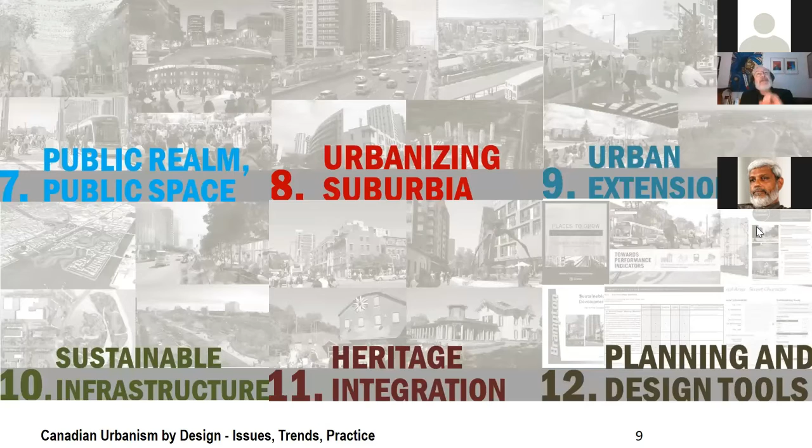Those are the 12 main trends, as I mentioned. I'm going to go very quickly through them, one by one, and try along the way. I try to do a bit of research and focus on what I think would be of interest to the participants.

Because, of course, the main thing is what is really common between a large cold country of the north and the opposite end of the world, an island, warm climate country. I think at the end, when I look at these days, there should be some commonalities in some areas of interest, because I mentioned global urbanism.

A few years ago, I had the chance to visit, a couple of times, and also do a charrette in Havana, Cuba—again an island, tropical, warm climate, very different than Canada. Working with architects, urban designers, and urbanists there, we found a number of real commonalities and real understanding of issues.

The first trend I wanted to highlight is regional planning. It's very important because we have these regional cities, large metropolitan areas. Here you have Toronto—the city itself has 2.7 million people, and the metropolitan area, depending how you measure, is around 6-7 million, going towards 8 and 10. Slightly smaller is Montreal, and then Vancouver.

This is quite challenging in places like the United States, and even here. What are the bodies that coordinate development for the entire region? The evolution is to go towards smarter growth management, something the government of Ontario started around 2006—the emergence of a stronger urban structure with nodes.

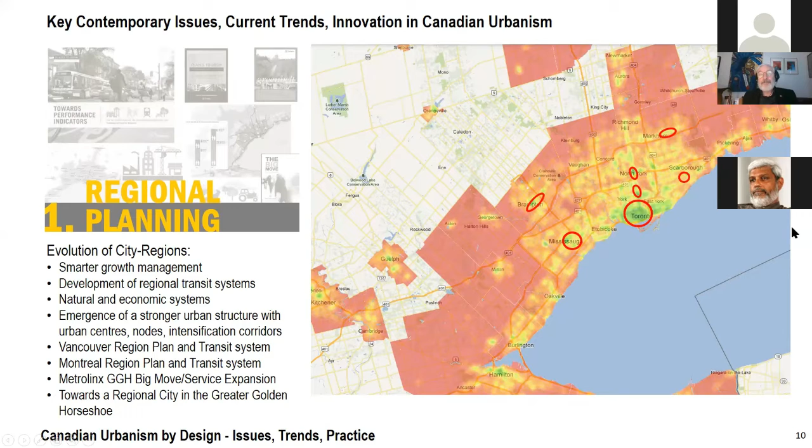The second major area of work and trend is this whole effort around resilience, sustainability, and public health—three overlapping areas, each with its own individual take. This is extremely important, as you know, through climate change all over the world, and there has been work starting on this for quite a while.

As an example, more recently on public health, over the last 15 years or so, resilience came to the forefront, mainly through adaptation as well as mitigation to climate change. It's extremely important because on one hand we have some of the highest gas emissions in the world due to our resources, but at the same time we have a lot of water and resources, and a growing population.

I wanted to highlight the tendency in the last few years toward measurement through a more global, composite system of indicators. Some focus on resilience, some—like the Conference Board of Canada's community well-being, or One Planet Living—try to put together not just specific aspects like energy or pollution, but also more social aspects: health and happiness, equity, local economy, culture, all together, to try to measure and respond more objectively to what makes a development sustainable.

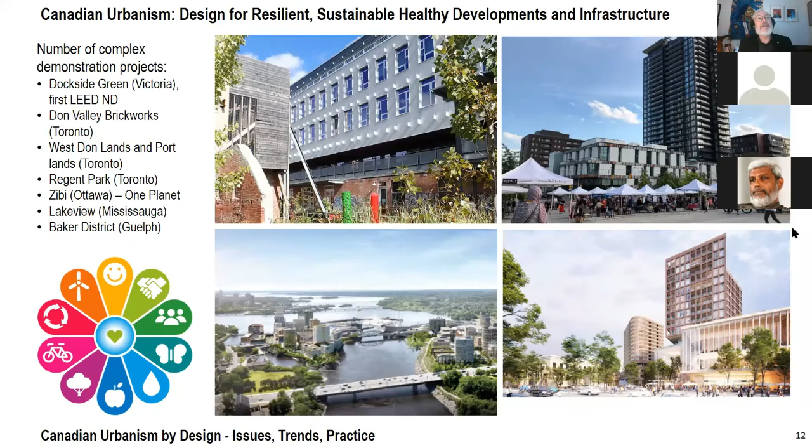There is the Zibi in Ottawa coming up, quite an interesting project, started construction, in a way built on the local heritage in the middle of the river, has some indigenous planning relationships and issues. And there are others I'll show a little bit later on.

Then here it's about the neighborhood scale, which in particular urban design deals with. I mentioned health by design, and this is work where we started to work together with public health agencies. It's not the mainstream healthcare, but the public health agencies, and now this is speeding up through the pandemic, dealing about nature in the city, looking at cities as a solution to global problems, including to a certain extent things like nowadays the pandemic, thinking about the human habitat in a system, in an ecological approach, thinking about livability, and a number of other things, access to food, eco-design.

It's a very important context here. In the region of Peel, which is the kind of county, the regional government here in Brampton, Mississauga, this emerged quite early on, and it was focused because at the beginning of active living, active transportation, because it's very much car oriented. It's a generally suburban area, and we work together with Peel Health in a very collaborative manner.

From those guidelines, we came up with measurement indicators, and those indicators right now are applied to various scales, from the precinct to the block to the site, and are being updated right now to include some of the resilience aspects.

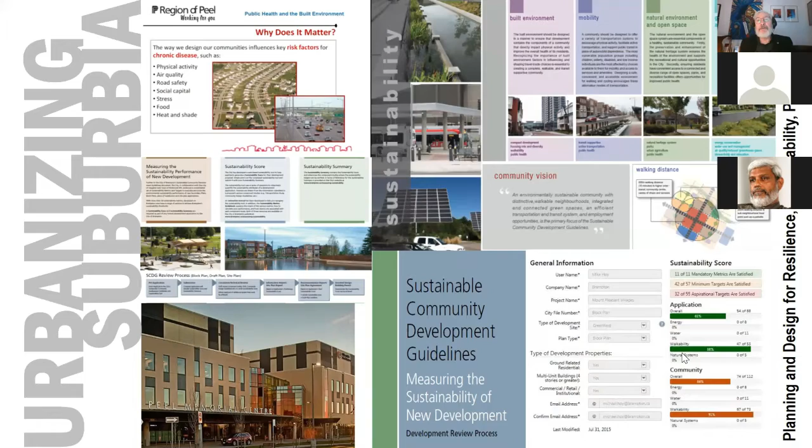You see here a bit of a different approach, which is more through conservation authorities, through engagement, the promotion of what we call low impact development, integration of nature, and I'm going to have a bit more later on, but going all the way down to engaging the residents, particularly in urban areas, to increase perviousness, to apply these softer methods as opposed to the hard engineering when it comes to infrastructure.

A third major trend across the country is sustainable mobility, because as I mentioned, the last 70 years, the orientation after the Second World War towards cars was very much a replacement of working transit systems in place since first was, of course, the rail system that united the country, including at the regional level, and then later was the streetcar system in the 1920s.

And now, of course, in the last few years, not just in the major cities, but also in the regions, right? That includes the whole hierarchy of system, from the regional, the high order, rapid transit, LRT light rail transit, BRT bus rapid transit, a lot of focus on active transportation, thinking about transportation, sustainable mobility, movement, access, level of service, then go beyond the conventional car-oriented engineering.

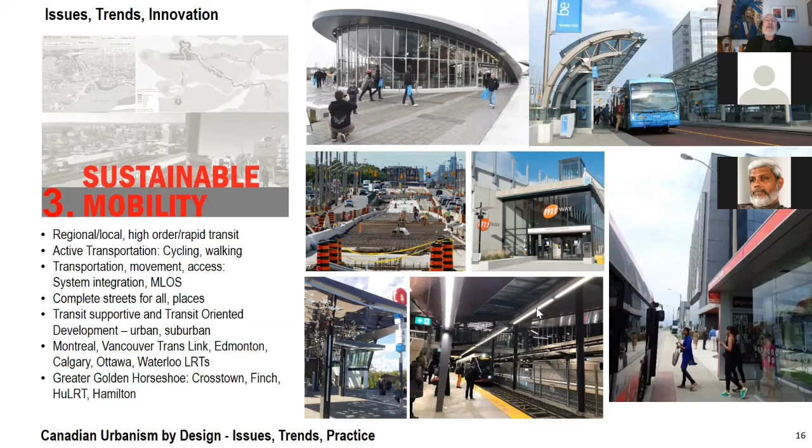The next two issues I'm going to mention very briefly, and my colleague James Park is going to talk a lot more about Toronto's perspective of redesign and downtown. But unlike many other places, in particular in the United States, Canadian large city downtowns have not generally been abandoned in the 50s, 60s and 70s. There were always people living here in Toronto.

But of course, the Toronto downtown started in the 80s to bring a different dimension. Montreal as well. You have here examples like Griffintown, a great development very close to the core of downtown. It was not just a business district with offices being emptied at 5 o'clock.

Vancouver was very much the same, to the extent that they became, in a way, victims of their own success with problems like very high densities. Affordability is a huge problem, lack of amenities, lack of open space. Mid-sized cities, though, and smaller towns, they still struggle, including the city where I work, Brampton, and then those suburban downtowns have challenges, but they're coming. We'll see a bit in a minute.

Another major trend is transit-oriented development and infill intensification, particularly large master plan communities. This was present in certain ways since Don Mills, the suburban towns of the 50s and 60s, but came to be in particular in the 70s and 80s in Toronto's St. Lawrence neighborhood, with the idea of continuing the street grid and integrating into the downtown.

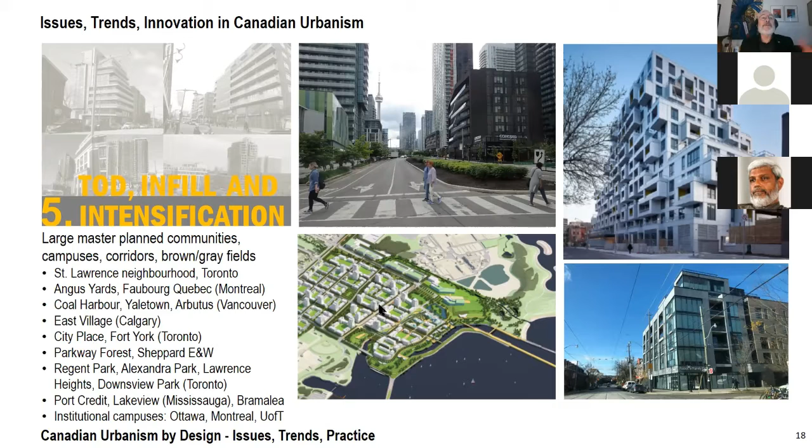This also could include the main institutional campuses - the University of Ottawa is integrated in Toronto, Ryerson, and in Montreal as well, integrated with the city. James is probably going to talk a lot more specifically about this aspect.

Very important and particular - we like to think this is a bit of a Canadian characteristic - the fact that we look a lot more at social aspects, social justice, diversity. There's less inequality; we usually compare, like many others, with the United States. This came since I would say the 70s, even the 80s, to think about vulnerable populations, social support and services, diversity, minorities, immigrant integration, affordable housing and public transportation.

These are very good unifying elements, and there's a long-standing tradition since the 60s and 70s, though going through challenges of privatization. Public realm amenities as places for all - age-friendly development, we call it, from 8-year-olds to 80-year-olds - and more recently, with the graying and aging of some segments of the population, thinking about aging in place.

There is great experience - I mentioned Regent Park, Alexandra Park, Benny Farm is a great development in Montreal I can relate to. This came right to the forefront because of the pandemic, but even before that. There's a lot of work still to do.

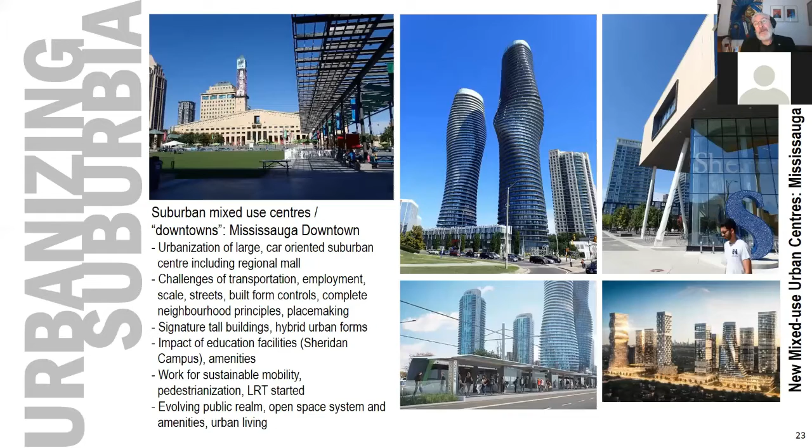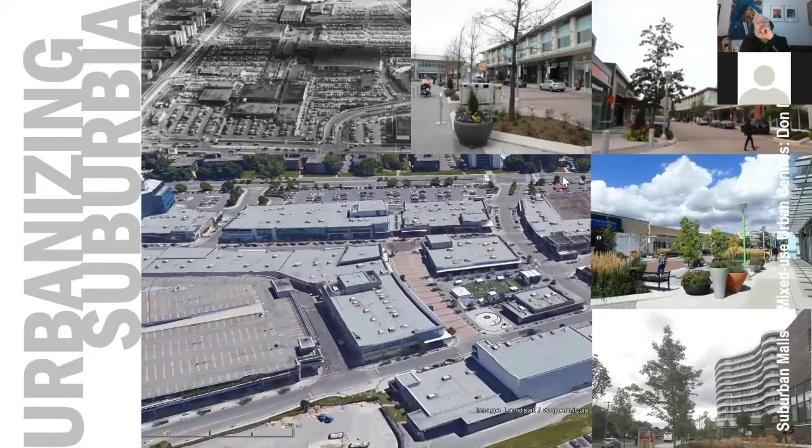Another major trend that started in Canada as well as in the States: in the 60s and 70s there were a lot of these car-oriented malls, surrounded by a huge area. This is the center of the mall at the center of Don Mills, huge parking lots surrounding the whole area with some little one-story buildings. This started around 10, 12 years ago to be intensified and urbanized.

They introduced the grid of streets, they introduced placemaking elements, the streetscape. It's more like a main street. It's still largely private, and the most important thing now is it's coming with the residential and the densities, and people actually living there. Right now in Toronto alone there are 22 projects of this kind happening, because those large parcels of the malls and major plazas are the most available land for development.

It's coming not just there, it's coming in Calgary and many other cities. It's a very important aspect, and they're becoming real centers at the end. One aspect that's sometimes neglected, and to me it's very important to unite the city together—I mentioned transit-oriented corridors—then it's good to have these nodes of density. How do you unite them? How do you build on the urban structure?

Here you have an example of my work from around 10 years ago, on Queen Street, which is a major spine uniting all the suburban areas we call 905—that's the telephone code for this area. This is linear transit-oriented development with nodes at the major stops, and the transformation of what is right now a very suburban 6-7 lane road into a complete street with transit in the middle, with BRT, and a variety of residential forms, making this really livable with supporting open space and so on.

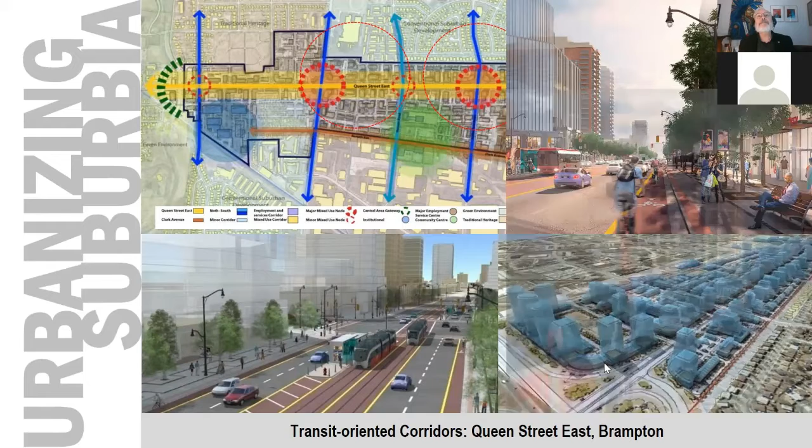And development is already happening. We hope to go from this transit system, bus-based now, into BRT in the near future.

Very important, as I mentioned a little bit, is this transformation. We have a lot of very wide, fast roads—killer roads. We hate them as urban designers. And transformation has begun. On the left side you have Highway 7 in Markham being converted, including bike lanes. In Vaughan, another city north of Toronto, there's this kind of woonerf design where there isn't a very clear definition and cars slow down—it's a place for pedestrians, a semi-private space. Development in Mississauga and others is quite challenging, working together with colleagues, engineers, but it's very important.

A major trend, also distinguishing many Canadian suburbs—where government's role was much more important as opposed to the States—is the reliance in urban context on urban amenities. You don't have to have a very big backyard because you rely on public libraries, recreation centers, parks, and so on. In the suburbs it's even more important—that's work we've done in Toronto, in Brampton, and many other places the last few years. You have some examples; we promoted this.

Modern design, because of the modernist tradition of our place—you have here examples of amenities in Chinguacousy Park in Brampton, including some very modern gazebos where people can gather. It's bringing together our very diverse population; in Brampton more than half of the population is born outside of Canada, making it one of the most diverse cities in Canada.

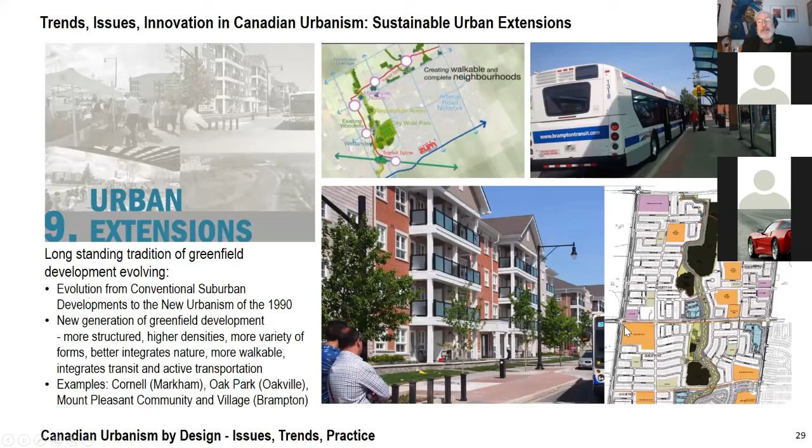The core of it, what we call Mount Pleasant Village, was designed as a more radial form. It's fully walkable, 5 minutes, 5,000 people. It has the square in the middle with public amenities, now the market, the bike system, and the first complete street, a place where in the square people can go. We have yoga day, a number of examples there.

And we use a lot of what we call alternative development standards. Innovation is very challenging, particularly when it comes to engineering.

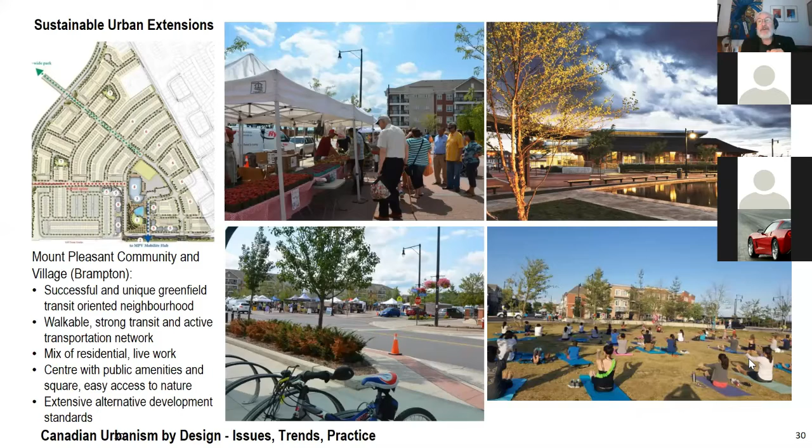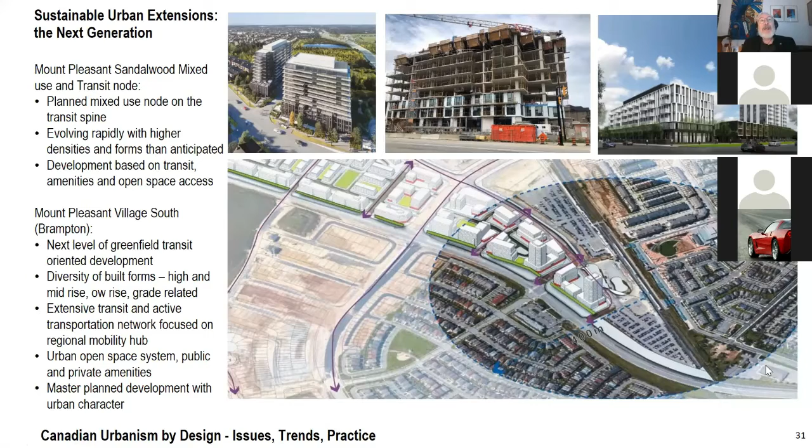Here you have the node, the center, we call it a mobility hub. You have transit expanding, the regional transit, 15 to 30 minute headway for the trains. You have the square on the north side, you have 24-story high-rises being developed, the whole neighborhood in that area, an open space system. It's all very much walkable. It's really a great story, a great example. I can tell people, if we can do it in Brampton, everybody can do it. It's established the new model for greenfield development.

The tenth item is sustainable infrastructure. It's a very important one, emerging particularly in the last few years. Why? Because, as I said, there was a lot of development in Canada, a lot of infrastructure built in the 50s, 60s, and 70s. Now that infrastructure—roads, sewers, water courses, bridges and all that—was done with the concept of the time, done monofunctional. The bridge has one function, to let cars cross a water body. Same for the roads, same for the water and all that.

Now a lot of these are coming of age, including highways, and they've started to fall apart. They need to be fixed, they need to be repaired. Now, because of the current view on resilience and sustainability, we can do that in a much better, more integrated way, where we look not just at functionality from the car perspective, but as a piece of resilience, a piece of green infrastructure, a piece that is also an urban design piece. It has an aspect which is not just aesthetics, it's functionality, and it's also a place for people. To me it's extremely important, and I'll show why.

There's a number of projects, including in Toronto, including in Calgary's East Village. I mentioned Bonaventure, Cartier Bridge. There are great projects in Toronto. Here you have a few examples: on the left side, a stormwater pond that, in fact, is a park feature in Calgary on the Bow River. On the right side, you have the port lands, and I just had a brief chat.

This used to be wetlands of Don River. The water was put in a channel at 90 degrees and looked at as a nuisance. Now the river is being recreated and put back. It's a $1.3 billion project that recreates nature, recreates habitat, recreates parkland, water storage, flood protection, and at the same time creates developable land on the side, because that creates this human habitat that I was mentioning.

On the lower right side is the first example built a few years ago, West Don Lands, where what you see here as a park with a little amenity on top is, in fact, a flood protection feature. It protects the major part of downtown from water, but it has a park on top of that. Not too many people realize what that is—it's not a dike, it's not a dam, it's something that people can use.

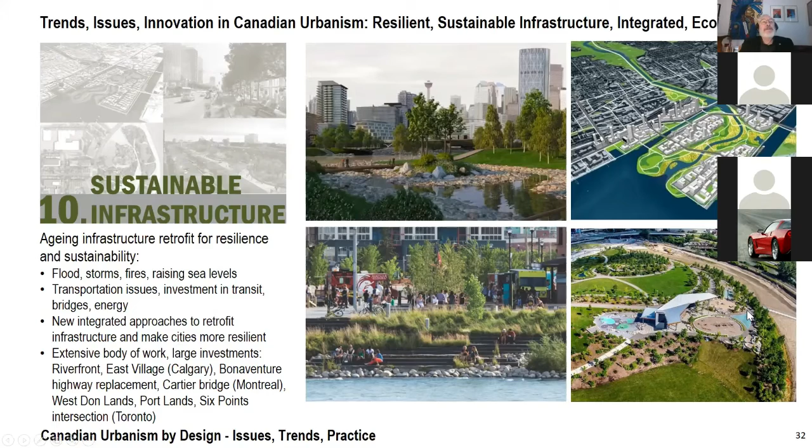Here I wanted to talk a little bit about the main project I'm working on right now, which is in Brampton. It's called the Riverwalk.

Brampton, this area was colonized by the British in the 1820s. Of course, they did this concession grid. Two of the major roads intersect on a creek. The creek didn't look like much—it was not enough water for the mill towns at that time.

But then every 5 years it started to flood the little downtown that developed. It's now downtown Brampton, a city of 660,000 to 670,000 people now. In the 50s, to take care of that, the channel you see on the right side was built, and that solved the flood problem for the next 75 years until now. Downtown never flooded, but it took the creek and the water away from the downtown and from people. Nobody knows that we have a little creek there.

In Brampton there's no mountains, no water body, it's just that Peel Plain. But guess what—with the advent of more catastrophic events through climate change, that whole area can flood again. Maybe tomorrow, maybe in 300 years, but as you know, the frequency is increasing.

We started around 2011, together with the Conservation Authority, to look at how we can solve the flood problem, but at the same time revitalize the downtown, which is prone to flood. How can we integrate this flood mitigation with economic development, resilient, sustainable, healthy development with public realm? How can we create a place, an attraction for a city that doesn't have anything major? How can we introduce innovation?

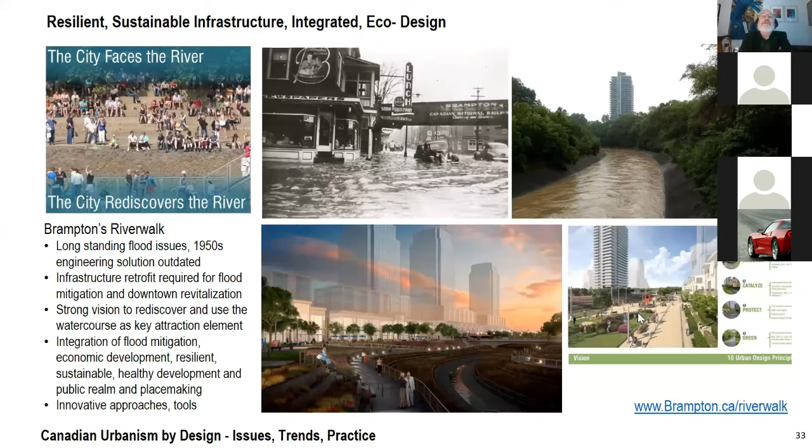We came with a vision in 2014—you have some images of how this channel, the creek, could look. We came with a number of principles, including to protect, to green, and we look at placemaking. You can see a lot more about this on the web address here if you're interested. Then, part of the vision, we have this integrated approach to planning.

We combine engineering, resilience, active transportation, public realm, and placemaking. We did an environmental assessment that was successfully approved last September. We secured funding from the federal government for 40% of the flood protection. We are working right now on an urban design master plan for the whole valley, and here's an example of what that means.

In a way, it's the Emerald Necklace of Boston brought back. It's creating a major asset and attraction. You'll see on the website, if you go, there is a video, there is a VR experience—virtual reality. That's a bit older, but we are updating it. In fact, we have that updated now.

Through the Urban Design Master Plan, through the detailed design for flood protection, we hope to go into construction by 2024. We still need some money for that. It's going to be a game changer for the downtown.

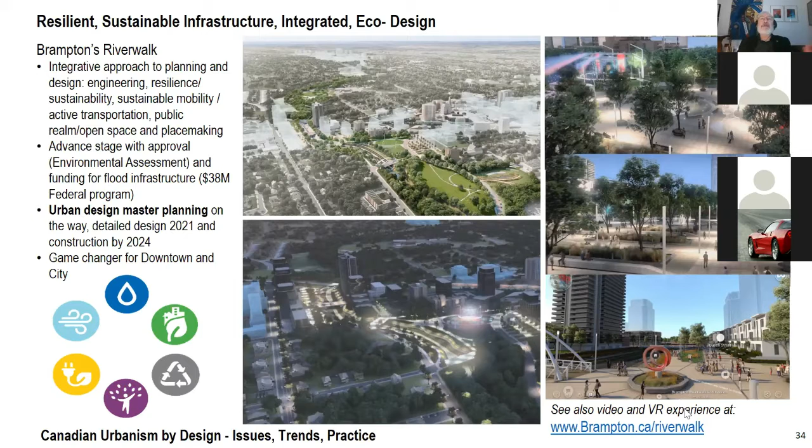Here I have some of the images of the parks, the squares, the place for entertainment, for people, the place where our very diverse population comes together. It's a place that can contribute to the public health of the whole area, access to nature, and so on.

And then the last trend is going to be in terms of planning and design, and the tools and the integration of design in the whole planning process.

Here we have in Canada quite some challenges, because starting mainly in the 60s and 70s, there was kind of a divorce between planning and physical planning, design, and architecture. As you know, the term urban design is specific to English language. Other languages and concepts like urbanism, Stadtplanung, or urbanismo, have design built into the concept. Then urbanists are also designers.

Then in Ontario, and Janaka is aware of that, and Jiva, 20 years ago, we started to go back into this, and we started to promote design in the planning process, in the planning profession, first with Ontario professional planners, later with CANU. We still work on that. There's a lot of work to do.

Part of that was to look at integration of design in the process. The diagram you see here is complex and takes quite some time, but shows how design at all the levels of planning, from the city-wide official plan to secondary plan for large areas to more detailed urban design focused plan, the precinct, the tertiary plan, all the way to subdivision plans, site planning, and so on. It's a thread going on in terms of built form, open space, character, and identity.

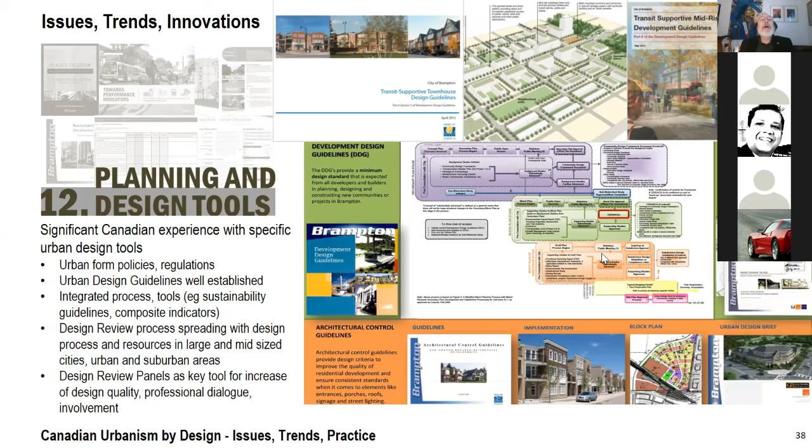Very important. Very briefly, I'll mention a tool. I don't know how your planning process is. In Canada, the development permit system came to be around 20 years ago, I think in Vancouver.

It brings together all these aspects that usually are disjointed, right? Policy, regulation like in zoning, guidance, and then the standards as well. In Brampton, we are the first city in Ontario to create such a system for a larger city. It could be a quick, effective development system, working on the quality. We have quality provisions here. It's an opportunity for what is called in the States form-based code, to integrate heritage, some standards. I don't know if you have that, but it's something important that we brought in Brampton as an alternative. It's slow to catch up though in Ontario, but that's another issue.

This is a bit of a new addition to my presentation slide, but I wanted, because of your interest in urban design and the profile of the Institute, to talk a bit about urban design in planning, in urbanism, at the municipal and private level, and the actions in particular.

Something with CANU, with the Urban Design Working Group, we set out to do some time ago: the need for design education among planners, engineers, other city building disciplines, architects and landscape architects. In December, I did a presentation at the Royal Institute. Many architects think, okay, I am an urban designer because I'm an architect. But there is an aspect of urban design that is not architecture at a larger scale. It has specific aspects, interdisciplinarity, and so on.

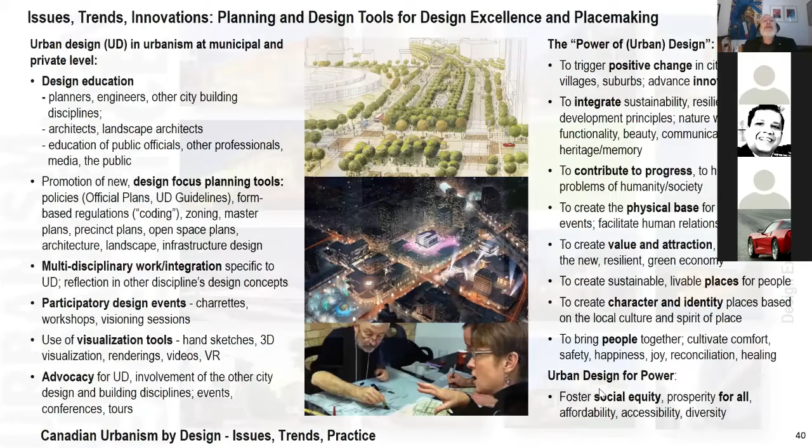Okay, for some reason this doesn't seem to... Okay. And related to that, the trend towards not just good design, but design excellence. There's a number of things that you have here.

It's a great way to use design, and particularly everybody has the right to access good design, not just downtown, not just wealthy people. That's why the suburbs in particular need these more than anybody.

And to wrap up, I think I'll try to do it in the next 2-3 minutes, a bit about the lessons of the pandemic. There was a lot of discussion, a lot of talk. It's still in the press. What's going to happen due to the pandemic?

And very briefly to conclude, I'm going to show some examples of the work. Access to nature and open space.

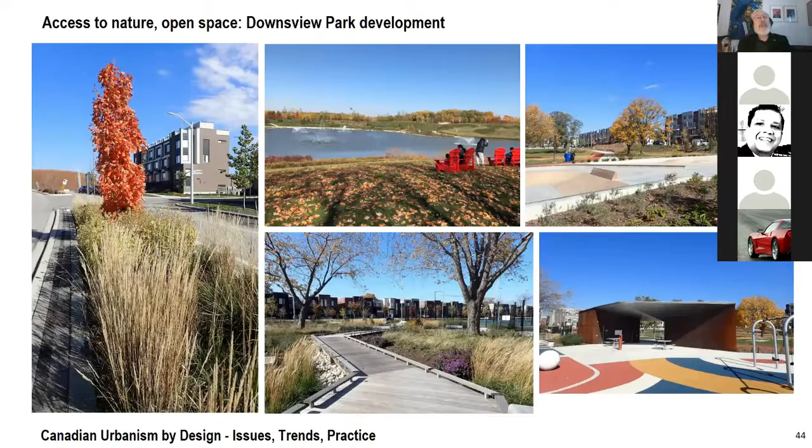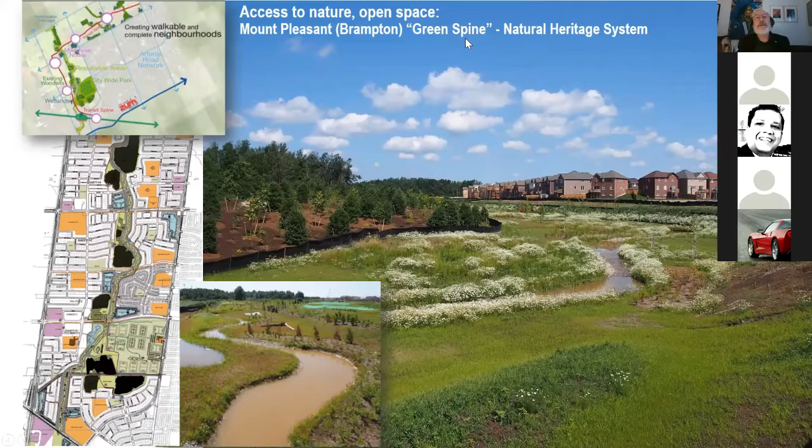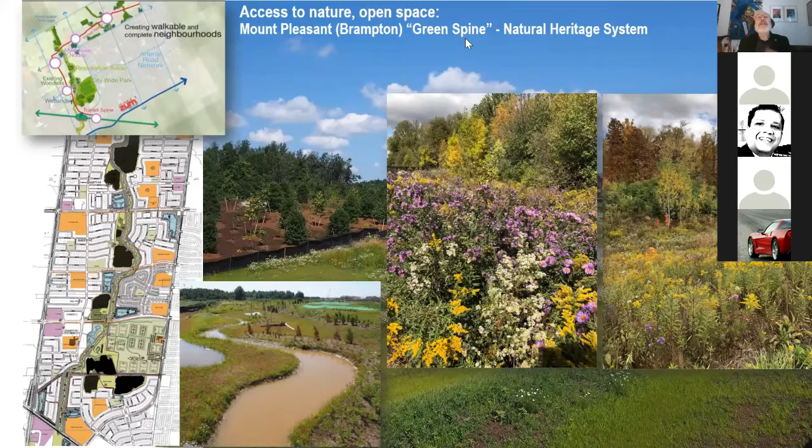Down in Brampton, we have the natural heritage area along this recreated creek, where nature took over in absolutely no time. It was a great experiment - basically this was farmland for 150 years, then we developed it and introduced this spine connecting woodlots and stormwater ponds, recreating water. Nature took over instantly. Look at the right side - you'd think this was the Peel Plain since 200 years ago. Nature takes over, just give it that opportunity.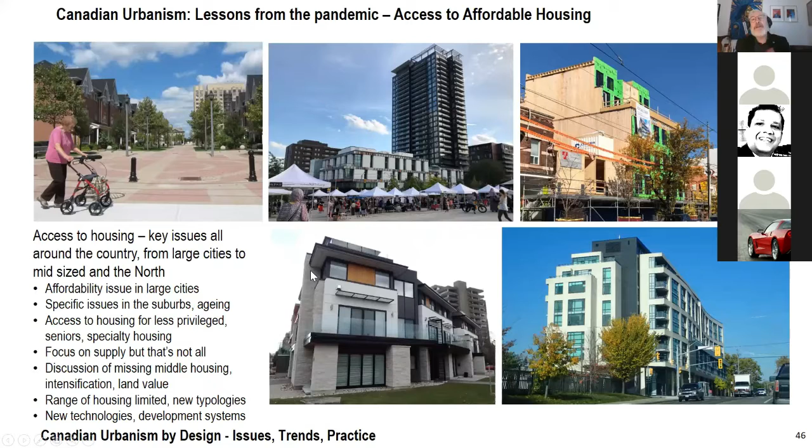On access to housing, a huge issue particularly in large cities, there's the whole discussion about missing middle - smaller incremental scale development. On the right side, you have timber construction, modern timber construction along Main Street, something we hope will come even more. Accommodating affordable housing isn't just through major infrastructure investment, towers and all that - it could happen through smaller, much more friendly development models. You have examples in Ottawa and some regions, mid-rise along transit, all these trends.

There's discussion that started from Paris about the idea of the 15-minute neighborhood. I looked at that and said, well, this isn't really that different from the ideal neighborhood concepts of 100 years ago, or even the way small towns like Brampton were created. Brampton 100 years ago was really a 15-minute neighborhood, complete with everything, all the amenities.

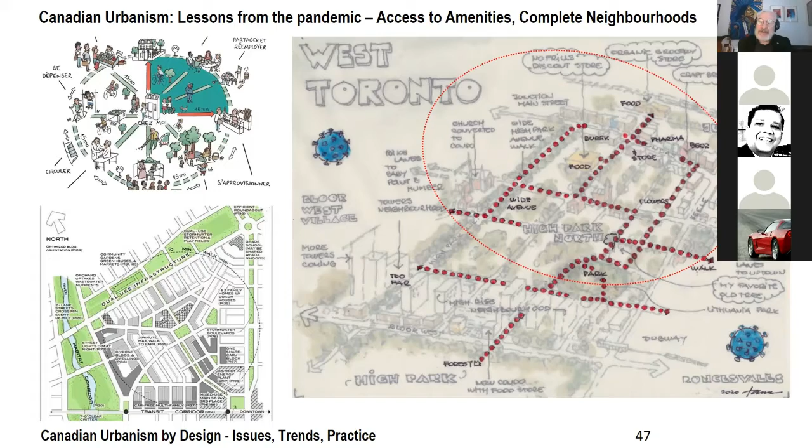On the right side is one of my sketches from the beginning of the pandemic, when I realized I live in a suburb of 1900. I have very much everything I need, including access to nature, greenery, and walkable paths. Right now we very much live in our neighborhood - there's no commuting, we use our car very little. This shows a kind of stress test in the pandemic of the neighborhood design I mentioned before.

There are great initiatives of sustainable mobility, long-awaited bike lanes for people who don't want to take the car, don't want to pollute, don't want to contribute to climate change - and it's physical exercise. In Toronto, finally, the bloor lanes, bike lanes, have been created in two months. In the summer, even in car-oriented Brampton, you see in the images at the bottom, suddenly taking advantage of less traffic, those bike lanes expanded like wildfire across the country.

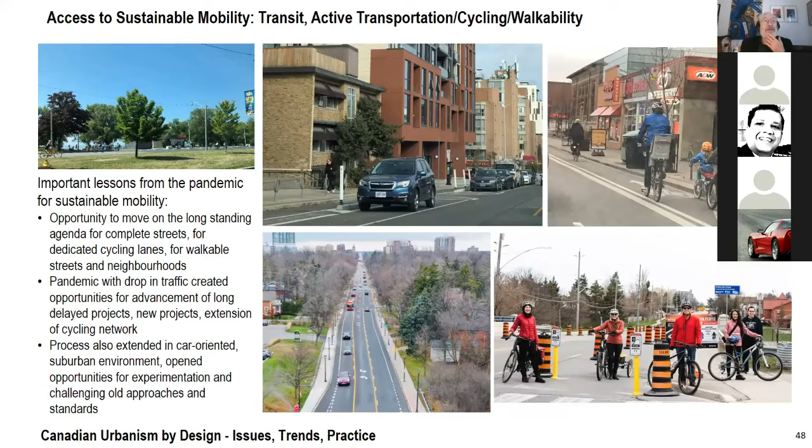There are challenges with that. The last thing I wanted to mention is the impact on the economy - the pandemic had a huge impact, shrinkage, loss of jobs, unemployment.

Is this an opportunity to build a better economy, a green economy? We have a great initiative from the federal government here about the green economy. You heard the new president and new government in the United States talking about that too. We're talking about a regenerative economy, learning lessons of the past, including from indigenous people who knew how to live with the land in a resilient way 300, 400, 500 years ago. It's about the restoration economy, encouraging smaller scale entrepreneurship through reviving main streets. It's about new localism - the global village showed the challenges of importing everything from overseas - local agriculture and so on. Very important, and a reflection in urbanism.

Well, I managed to do it in almost an hour, I think. I hope I'm okay in terms of time. Those are some of the conclusions, and I'm willing, if you have comments, questions, for the next half an hour or so - please let me know, and I'll be very happy to respond. Now back to, I think, the moderator, Janica, right?